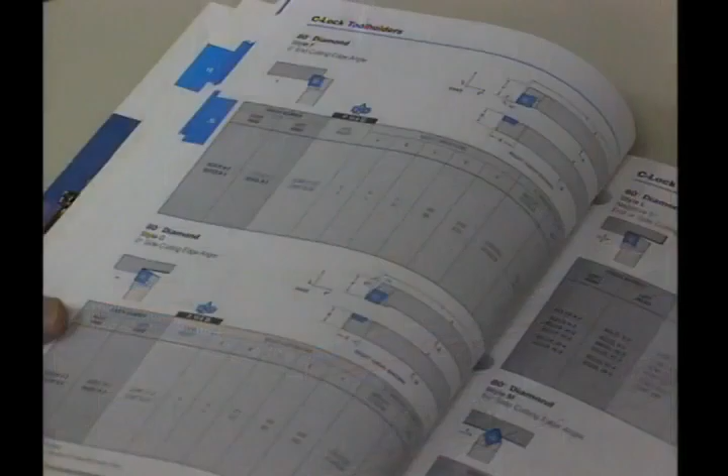Tooling incorporates thousands of different cutting tools and tool holders for discrete parts manufacturing. Principal categories within cutting tools include single-point cutting tools, such as lathe tools, multi-point cutting tools, such as milling cutters, drills, reamers, and taps. Cutting tools are either standard tools, which are purchased as catalog items, or special tools, which are designed and built for a special machining job, often to suit a particular workpiece.

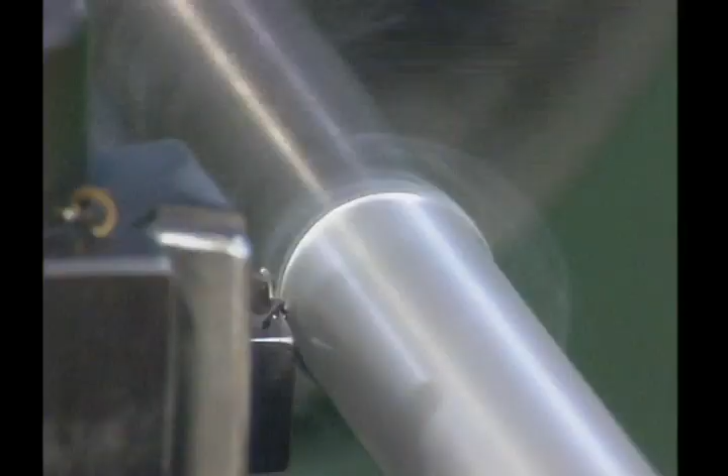The main objective in the selection and application of cutting tools is to safely machine a workpiece in the shortest possible time while meeting the part's quality requirements. Furthermore, the specified tooling should be the least costly and least complex tooling available to satisfactorily fulfill the qualitative and quantitative workpiece demands. It is estimated that nearly 50% of all cutting tools are used incorrectly.

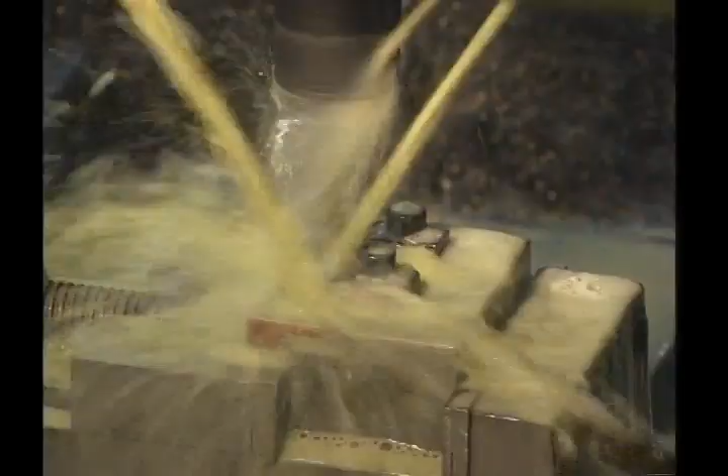Additionally, the number one error when formulating tooling selections is calculating monetary savings based on lowest cost per tool rather than on maximized productivity and extended tool life.

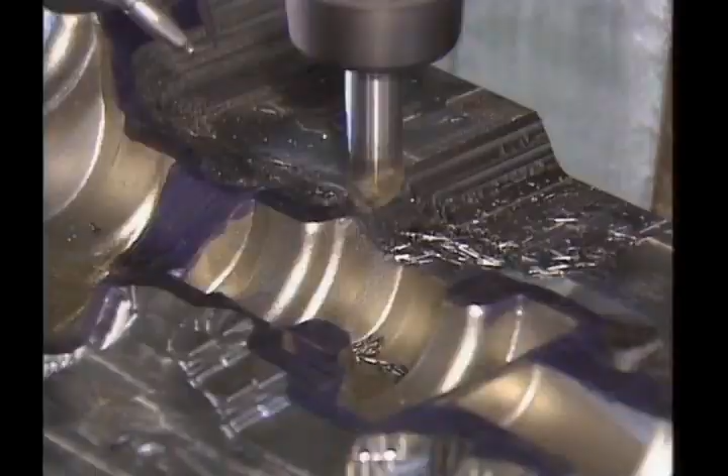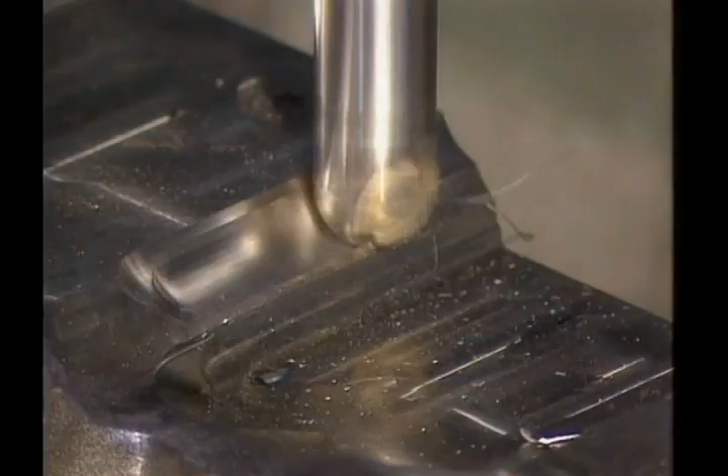To effectively select tools for machining a part, a machinist must have specific information about the workpiece, such as the starting and finished shape, the hardness, the tensile strength, and abrasiveness of the material. These factors all influence the interaction between the tool and the work. The machinist also needs to know whether the workpiece material breaks into short chips easily or whether it tends to flow into long, hard-to-break stringy chips.

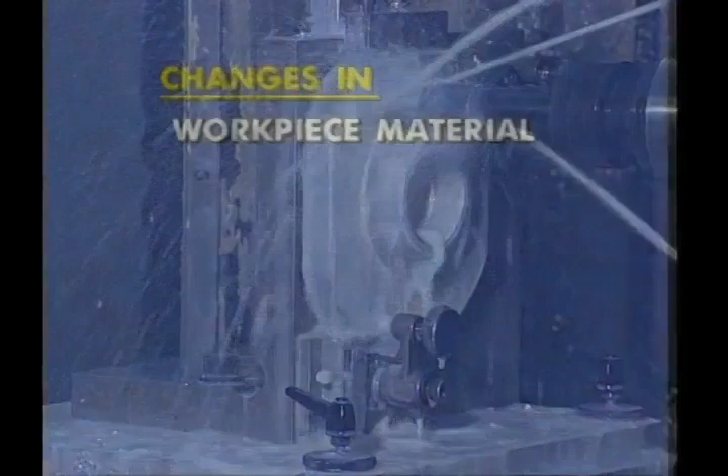Also important is the part's work-holding setup, which properly orientates and holds the workpiece, and the power and speed capacity of the machine tool. Changes in the workpiece material, part tolerances, geometries, and quantities required often demand corresponding changes in the tool materials and/or tool geometries selected.

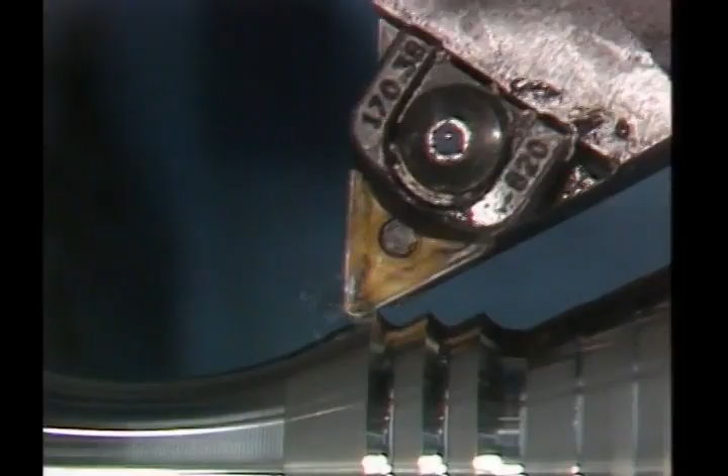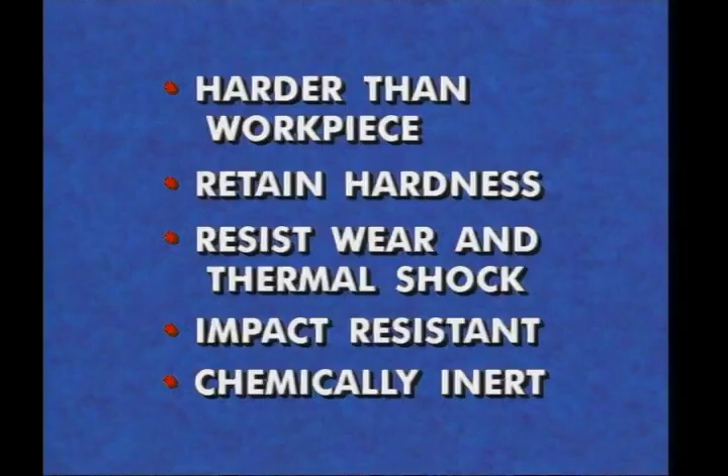For the wide variety of machining applications, there is a corresponding necessity for different cutting tool materials. The ideal cutting tool material should be harder than the workpiece it is cutting, be able to retain its hardness and stability at high temperatures, resist wear and thermal shock, be impact resistant to withstand the mechanical shocks of milling, and also be chemically inert to the work material and the cutting fluid.

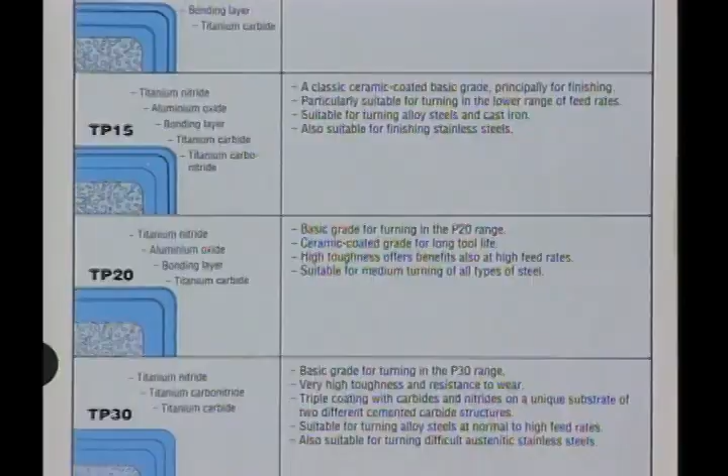No single cutting tool material incorporates all these qualities. Instead, trade-offs occur among the various tool materials. For example, materials with excellent chemical and thermal stability, such as ceramics, tend to be brittle, with limited resistance to mechanical and thermal shock. These variable properties take place both within a material class, such as different grades of carbide, as well as when comparing different classes of tool materials, such as high-speed steel and carbide, or carbide and ceramics.

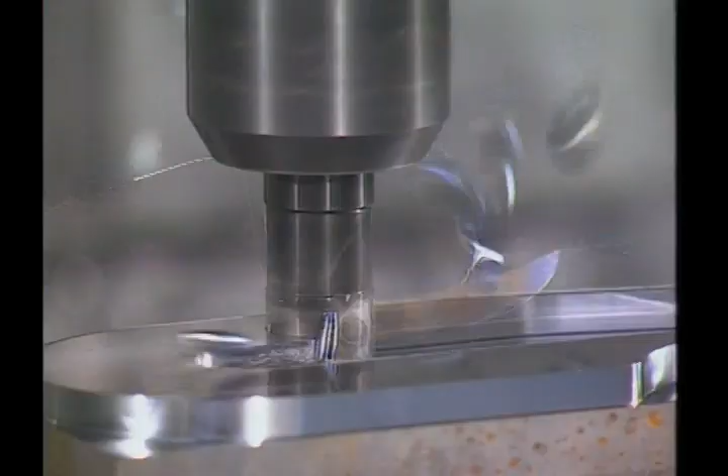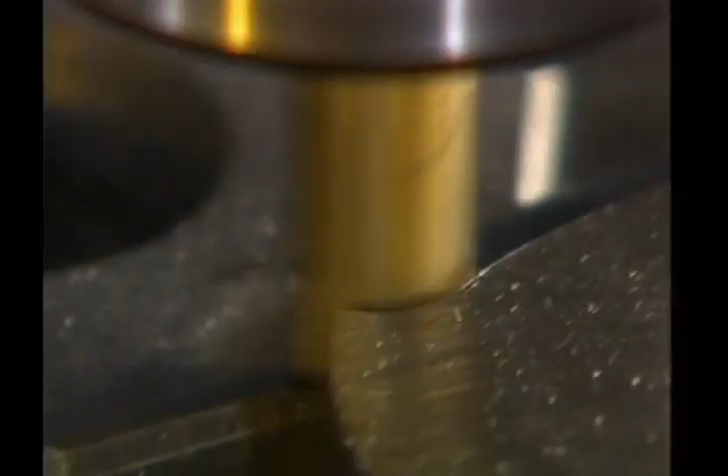Every new and established tool material has an application area in which it outperforms the other cutting tool materials. Newer materials tend to minimize but not eliminate the application of older materials, such as high-speed steel. The development of cutting tool materials has offered steady advancement in the rate of metal removal and, consequently, in the need for more heat-resistant materials. So there has been a progression from high-speed steel to carbide to ceramics and onto other super-hard cutting tool materials.

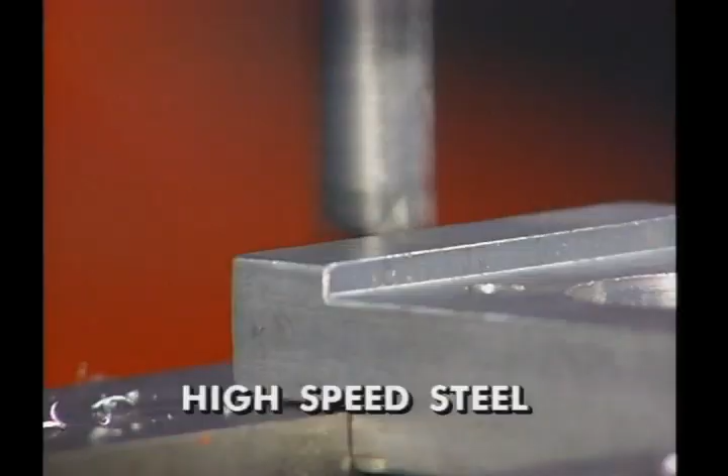High-speed steel tools were introduced around 1900 and gradually replaced the carbon steel tools of the 19th century. High-speed steel cuts about 4 times faster than the carbon steel tools they replaced, hence the name high-speed steel. It operates at temperatures up to 600 degrees centigrade. There are over 30 grades of high-speed steel in 3 main categories: tungsten-based, molybdenum-based, and molybdenum cobalt-based.

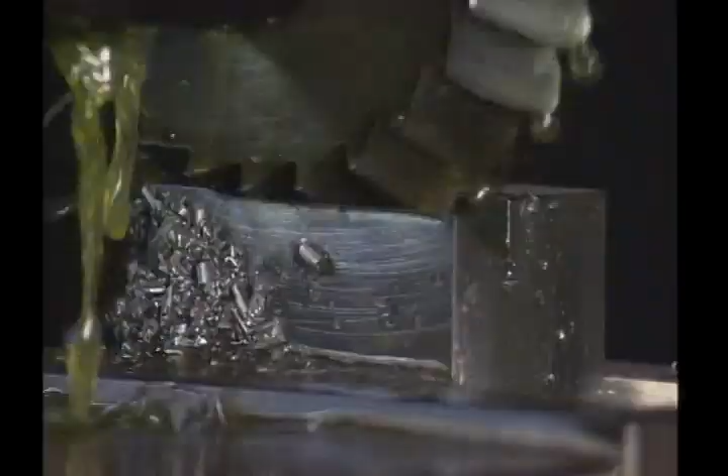Since the 1960s, a form of high-speed steel called powder metallurgy high-speed steel has allowed tools such as drills, milling cutters, and form tools to be made to near-net shapes that offer superior grindability. The use of coatings, particularly titanium nitride, allows high-speed steel tools to cut faster and last longer. Titanium nitride provides a high surface hardness, is resistant to corrosion, and minimizes friction.

In industry today, high-speed steel tools have been replaced by carbide tooling in many areas, but high-speed steel tools are still preferred for some tool room and low cutting speed operations, and for certain tool types such as small diameter drills, taps, and end mills.

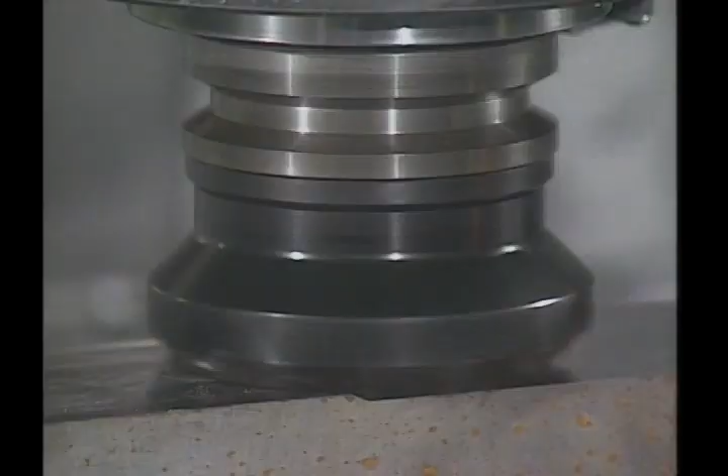Carbide tools were introduced from Germany in the 1930s and today are the most widely used cutting tool materials. Carbide and coated carbide tools in general cut about 3 to 5 times faster than high-speed steel and operate at temperatures up to about 1200 degrees centigrade.

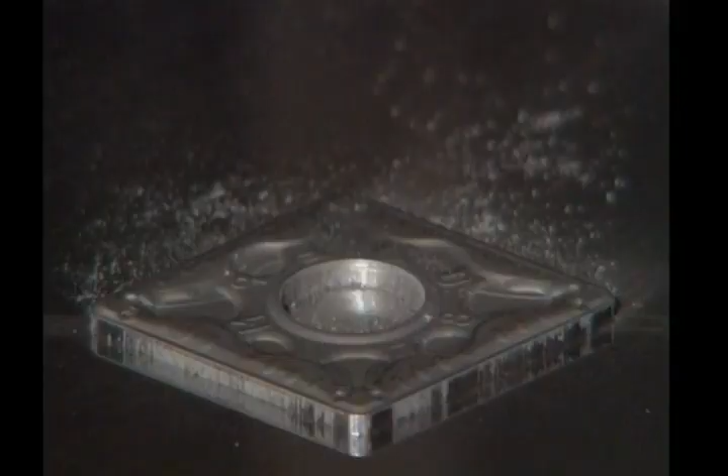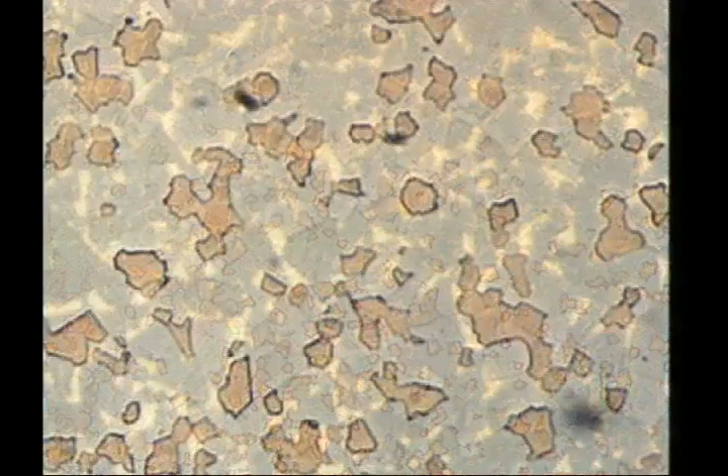Cemented carbide is a powder metal product made up of finely ground hard carbide particles cemented together by a binder. The major categories of hard carbides are tungsten carbide, titanium carbide, tantalum carbide, and niobium carbide. The hard carbide particles are from 1 to 10 microns in size and make up from 60 to 95% of the material. The binder is mostly cobalt.

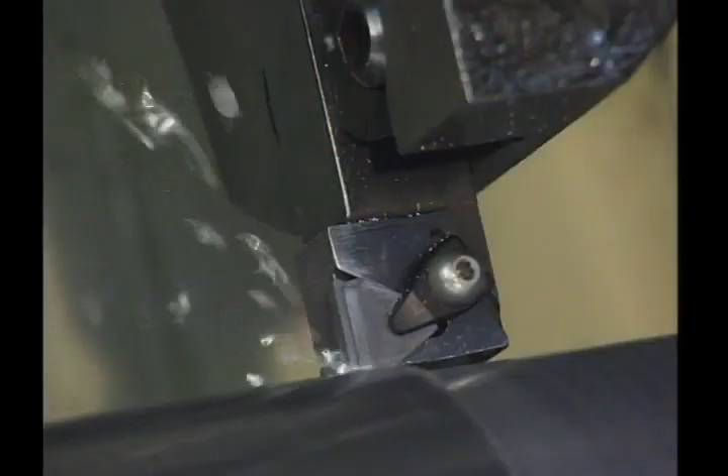Variations in particle size, binder, metallurgy, and manufacturing techniques cause the properties of carbide tools to vary widely, particularly in the balance of hardness and toughness. For example, a higher tungsten content increases the wear resistance of a carbide insert but reduces strength. A higher percentage of cobalt binder increases strength but lowers wear resistance. Additions of an alloying agent, such as tantalum, can increase a carbide grade's resistance to heat but reduce its strength.

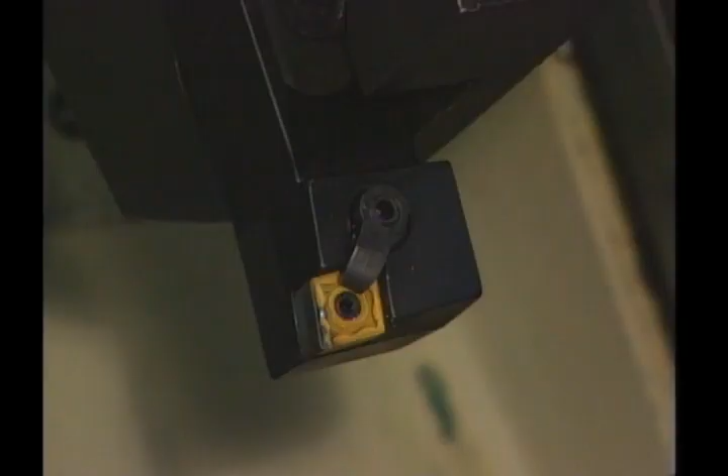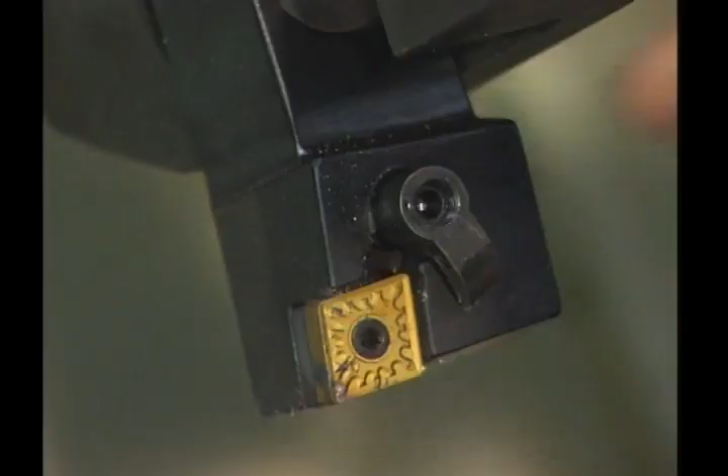Carbide is utilized for solid round tools, such as end mills and drills, or in the form of inserts clamped to a shank or holder. Inserts may be indexed to another position when an edge has worn. When all the tool edges on an insert are dull, the insert is generally thrown away or recycled. Some inserts are single-sided, others double-sided.

Every manufacturer of carbide tools has a variety of carbide grades for specific work materials and types of machining applications. Choosing the correct grade of carbide can double tool life or double the cutting speed for the same tool life. Tough, shock-resistant grades are needed for interrupted cutting. Harder and chemically stable grades are needed for finishing steel at high speed. Heat-resisting grades are needed for machining superalloys, such as Inconel and Hastelloy.

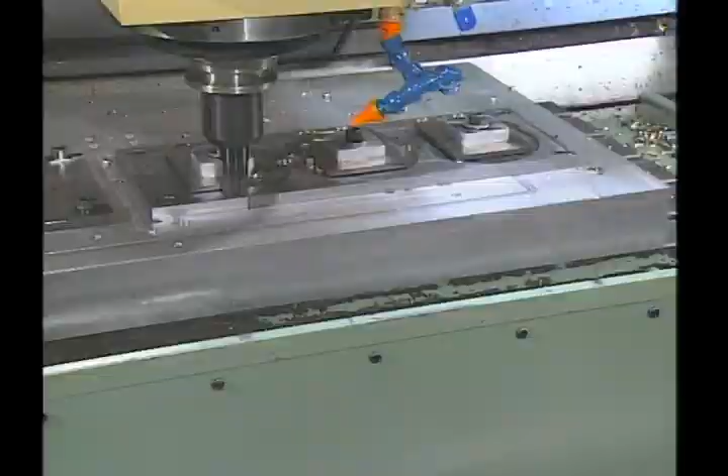There are many considerations when selecting a carbide grade for metal cutting, such as the type of workpiece material, especially its hardness, and the condition of the workpiece's outer skin. If it is a forged or cast workpiece, a tougher insert should be selected. Is the cut heavy or light? Is the machine tool and work holding setup rigid or loose? If loose, then a stronger, more durable carbide grade should be selected.

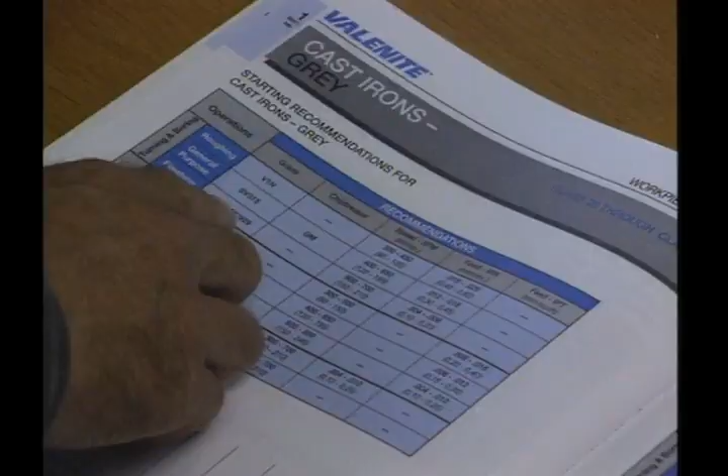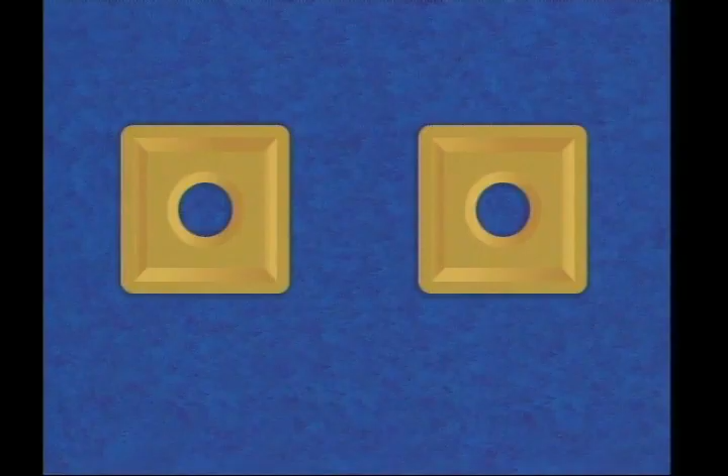Because there are no effective U.S. or international standards for carbide grade specifications, it is the carbide suppliers who recommend which grades they believe are suitable for given applications. Two carbide grades from different suppliers with identical coding in the International ISO 513-1991 standard will likely have different compositions, microstructures, coatings, properties, and, most importantly, performance.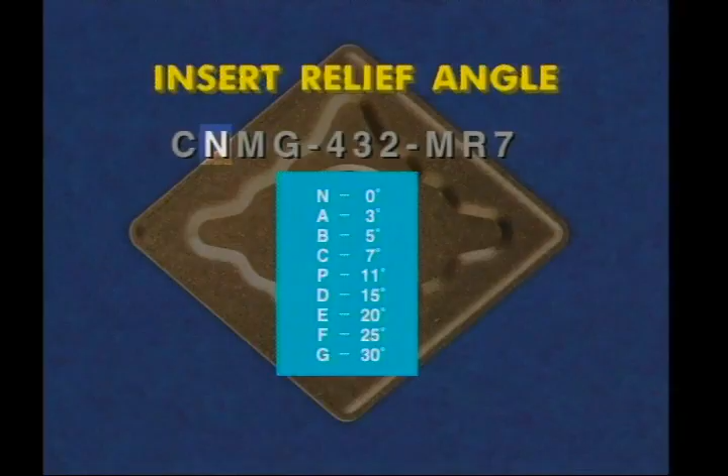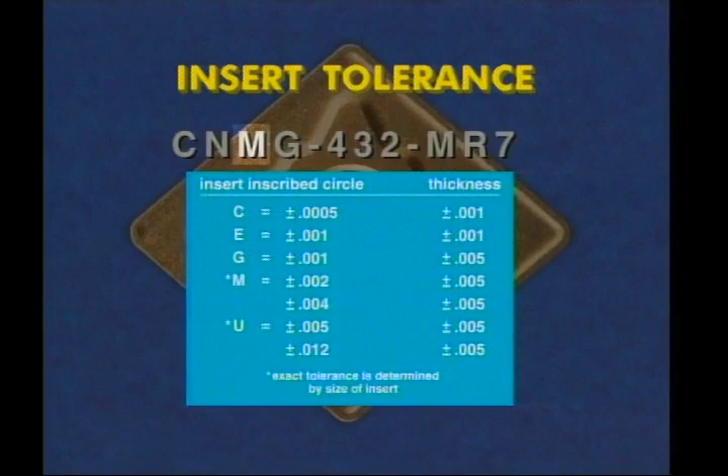Although carbide inserts are not standardized by application, they do carry their own 7-character ANSI code, which is used for their identification. The first character represents the insert's shape. The second character represents the insert's relief angle, which may be from 0 to 30 degrees. The third character represents the insert's tolerance class. Molded inserts usually have a code M tolerance and are the most common.

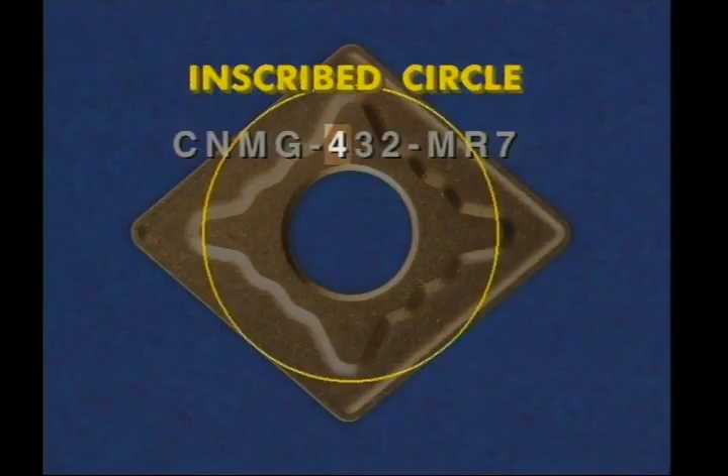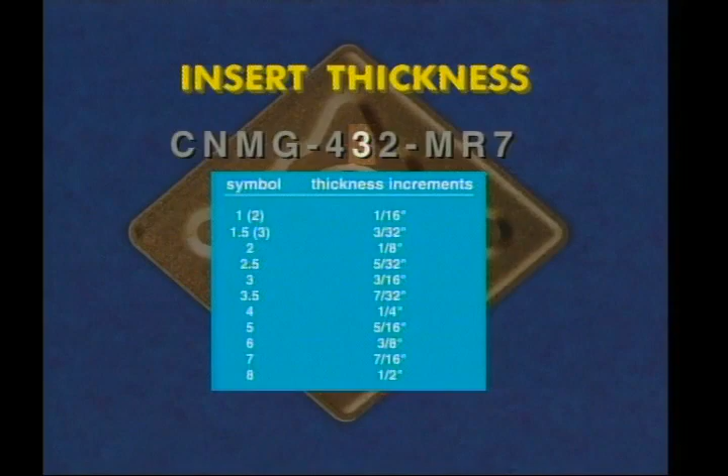The fourth character represents the type of insert with regards to its required clamping system. The fifth character designates insert size by the largest circle which can be inscribed within the perimeter of the insert, known as the inscribed circle or IC size. The sixth character represents the insert thickness. Harder materials and higher feed rates require thicker inserts to withstand the cutting forces. The seventh character represents the corner radius on turning inserts.

On milling inserts, this character represents the wiper edge angle. This ANSI classification system does not categorize everything. For example, the varieties of chip breaker geometries in carbide turning inserts are not required to be covered, but many manufacturers do add a chip breaker code.

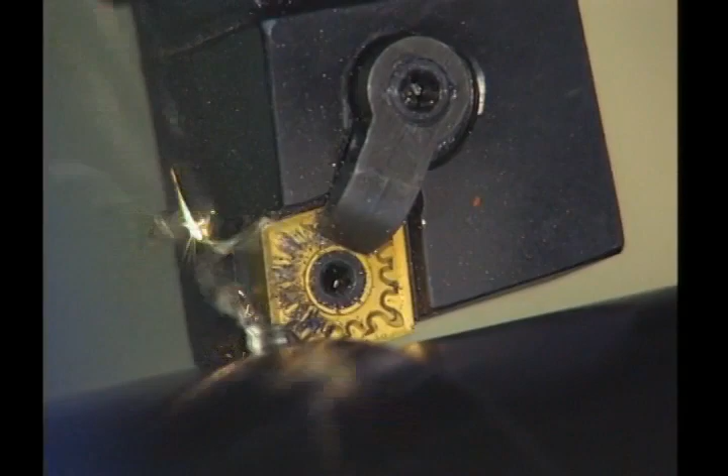Two-thirds of all carbide tools used are coated, and a coated carbide should be the first tool material considered for most operations. In general, a coated carbide tool may have over 3 times the tool life of an uncoated grade, or may operate at cutting speeds 2 to 4 times higher for the same tool life. These coatings help overcome carbide's primary limitation: as fracture resistance or toughness increases, wear resistance or hardness decreases. These wear-resistant coatings provide carbide grades with broad application ranges, offering a combination of characteristics not obtainable with carbide alone.

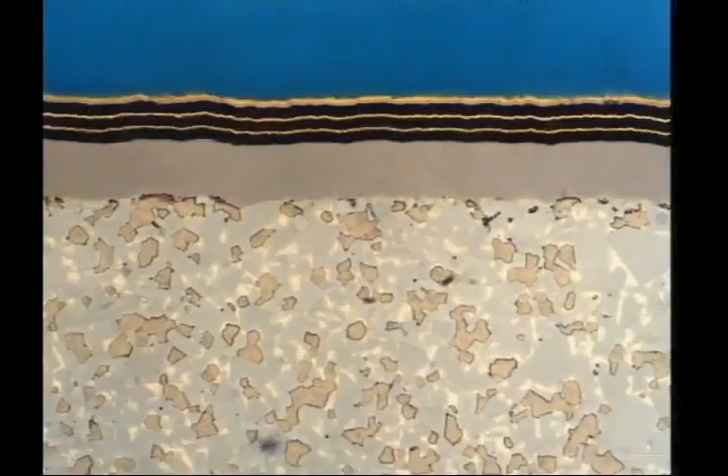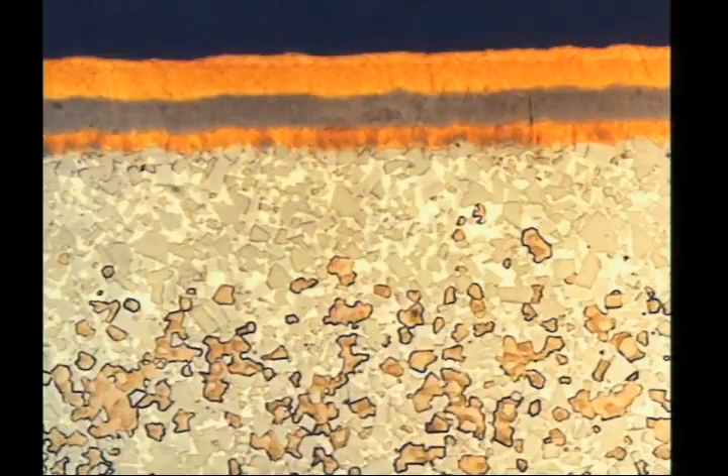Most coatings are under 1/1000th of an inch thick and have several layers. Each layer has a particular benefit, such as resisting heat or decreasing friction. The main insert and cutting tool coating materials are titanium carbide, titanium nitride, aluminum oxide, and titanium carbonitride.

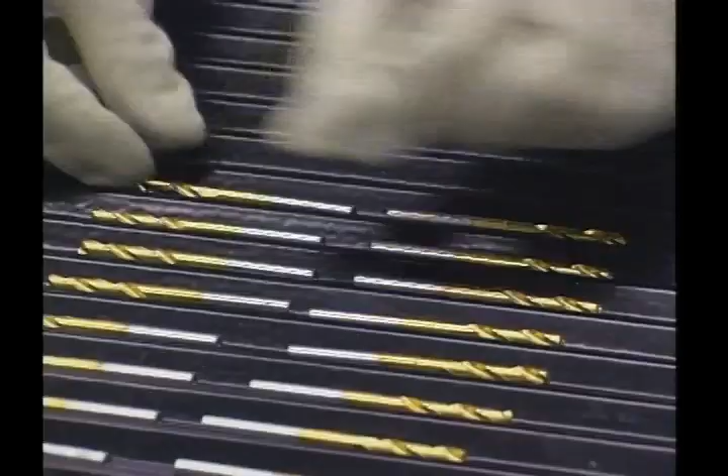Aluminum oxide and titanium carbide are very hard and chemically inert, and titanium nitride minimizes friction. For an appropriate coating, the coating material must adhere or bond strongly to the carbide tool surface. The two major coating methods are chemical vapor deposition and physical vapor deposition.

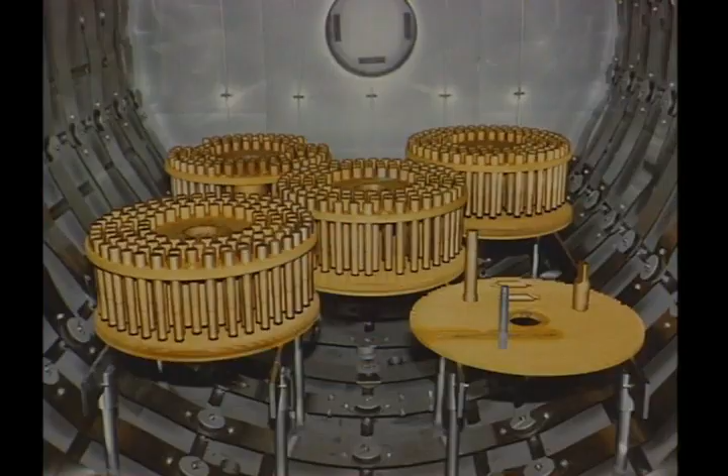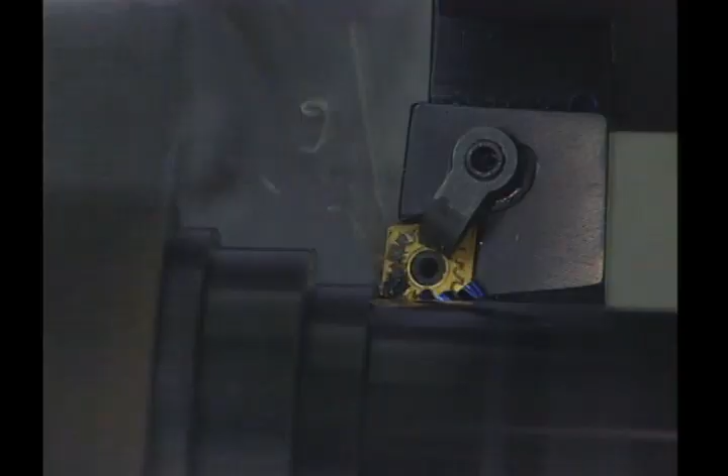The chemical vapor deposition process takes place at about 1,000 degrees centigrade and is typically required for multi-layer coatings. The physical vapor deposition method takes place at temperatures around 500 degrees centigrade and is used for single-layer or dual-layer coatings. Coated carbides are more costly on a per-insert basis than uncoated inserts, but they achieve greater productivity. In terms of parts per edge, the coated carbides have the advantage.

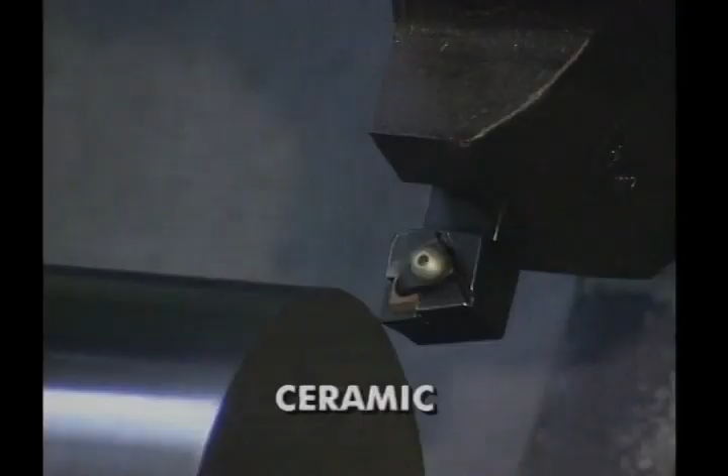Ceramic tools are harder and more heat-resistant than carbide tools, but also more brittle. They have been successful in machining cast iron, hard materials, and superalloys. Best results are at high speeds, which mean high cutting temperatures.

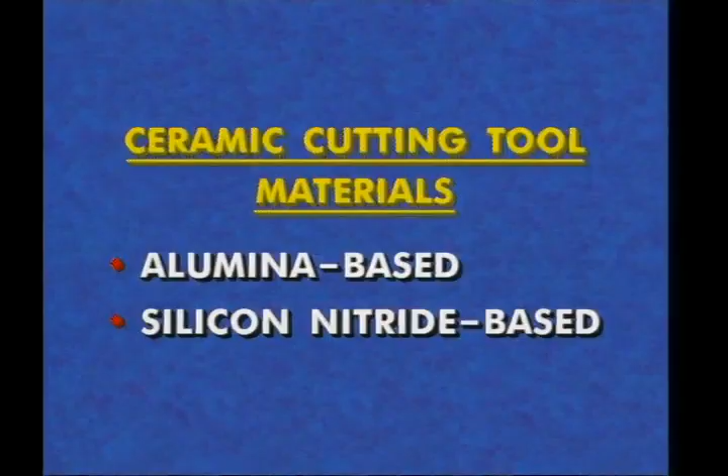Ceramic cutting tools can be divided into alumina-based ceramics and silicon nitride-based ceramics. Alumina-based ceramics are used for high-speed semi-finishing and finishing of ferrous and some non-ferrous materials. These tools are not good with aluminum because of an affinity between the materials. Alumina-based ceramics offer mechanical and chemical wear resistance, but lack toughness and thermal shock resistance. Thus, they are generally not used for milling, rough turning, or for interrupted cuts.

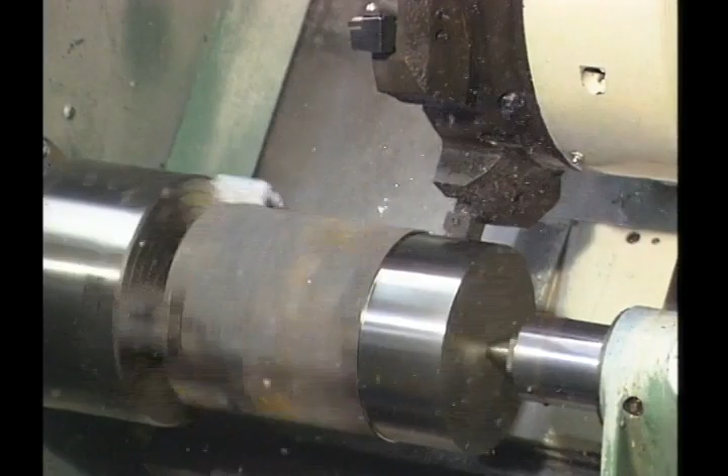Silicon nitride-based ceramics, also called Sialons, offer greater toughness and thermal shock resistance than alumina-based ceramics. They are used in high-speed roughing applications and have excellent abrasion resistance. Silicon nitride-based ceramics are used for high-speed machining of gray cast iron, as well as on superalloys such as nickel and cobalt-based work materials.

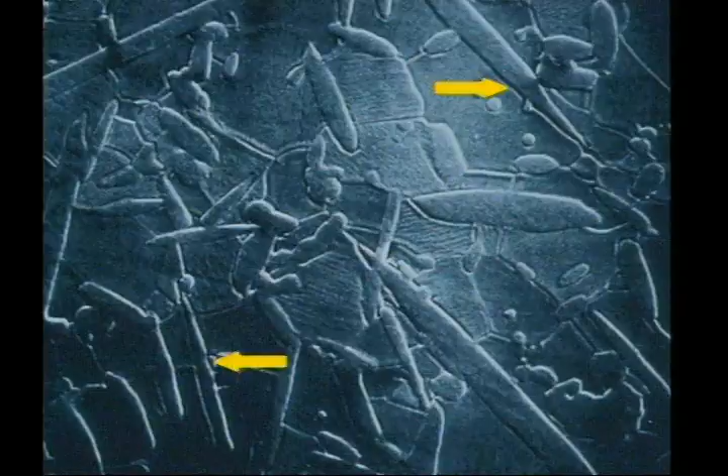Whisker-reinforced ceramics, with silicon carbide reinforcing whiskers in an aluminum oxide matrix, are stronger than the brittle ceramic matrix alone. The whiskers act like rebar in concrete, adding mechanical strength and thermal conductivity.

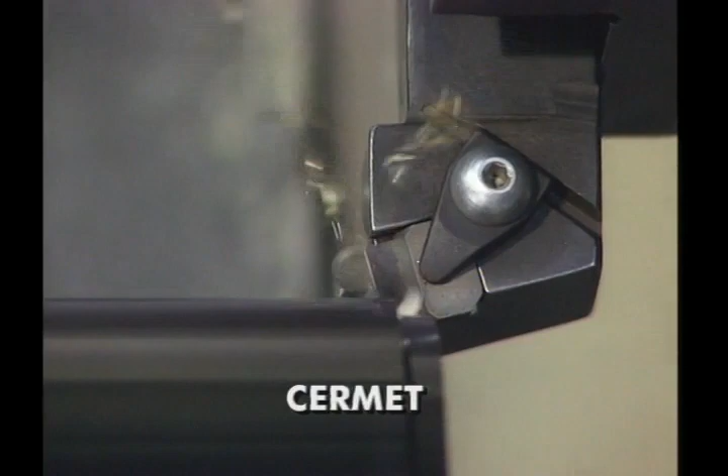Cermet tools are composed of materials commonly applied as coatings to carbide tools, titanium carbide and titanium nitride. The solid Cermet insert offers excellent resistance to various causes of wear in machining, especially chemical resistance. Initially used only for semi-finish and finish turning and boring, some Cermet grades are now tough enough to handle rough turning as well as milling applications on carbon steels, stainless steels, and some ductile irons.

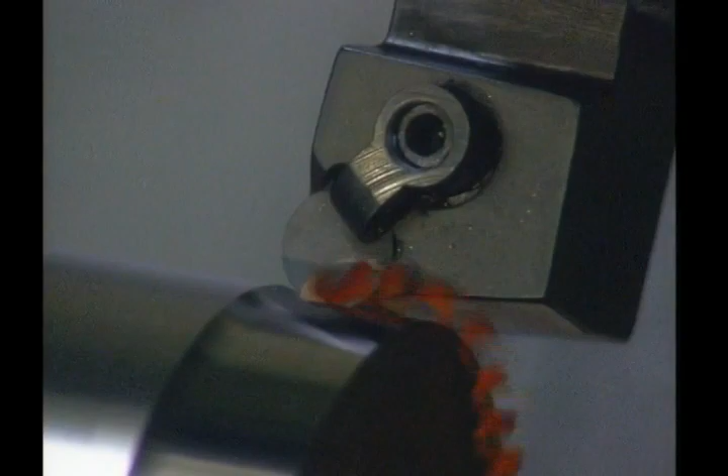Super hard tool materials are divided into two categories: cubic boron nitride and polycrystalline diamond. Typically, a small tip of one of these super hard materials is bonded to a carbide insert base. Super hard inserts may cost 30 times more than a carbide insert, so their use is limited to well-chosen, cost-effective applications.

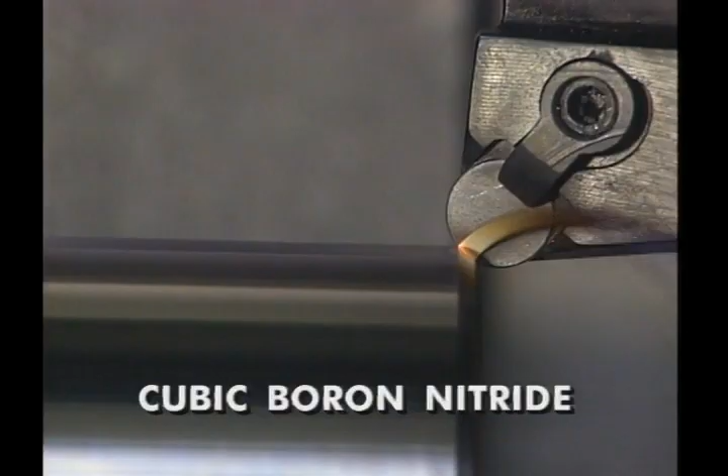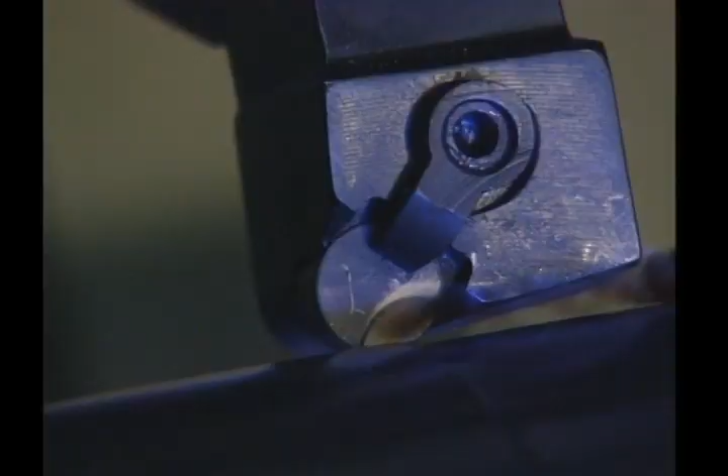Cubic boron nitride, or CBN, the second hardest material after diamond, is used to provide long tool life in machining very hard, tough ferrous materials, hardened die steels, alloy steels, and hard-facing materials. CBN is a hard, brittle material requiring cutting-edge preparations to suit application needs. Other techniques are utilized to protect the cutting edge, such as the use of a lead angle where possible, and a strong shape, such as round or square, is recommended.

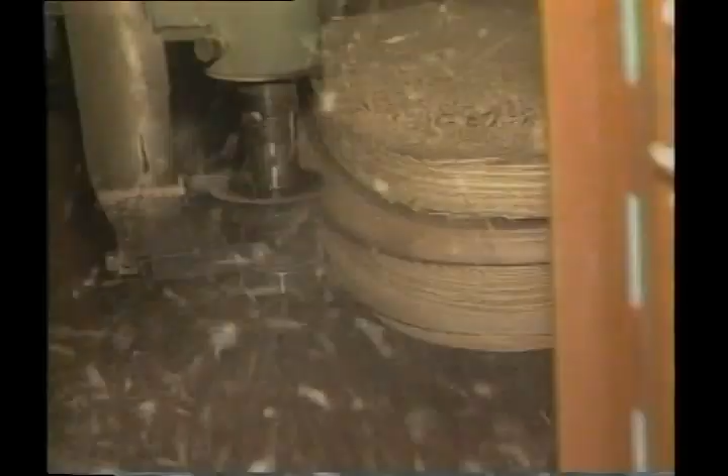Polycrystalline diamond, or PCD, is composed of micro-sized diamond particles in a metallic binder and is over 50 times harder than common carbide. PCD is used for non-ferrous applications and also cuts abrasive materials such as glass, reinforced plastics, and hardwoods for furniture manufacturing. In some high-volume applications, PCD inserts have machined parts for 6 months before having to be replaced, outlasting carbide by up to 100 times.

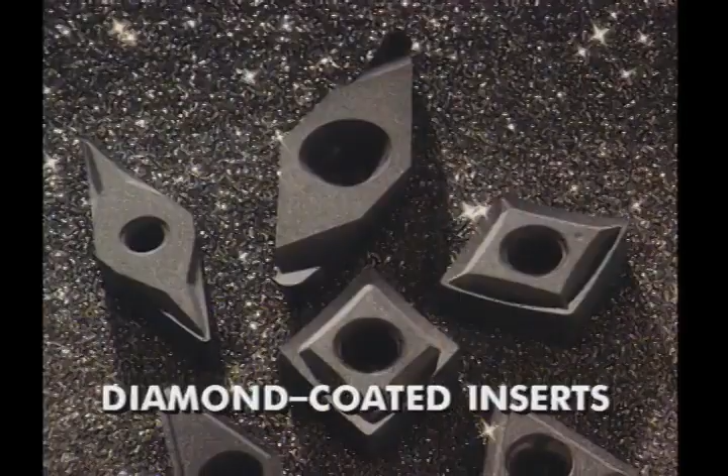Diamond-coated carbide and ceramic inserts are a recent addition to cutting tool materials. They offer a greater variation in geometries than do PCD inserts, but like PCD, can only be used for machining non-ferrous materials.

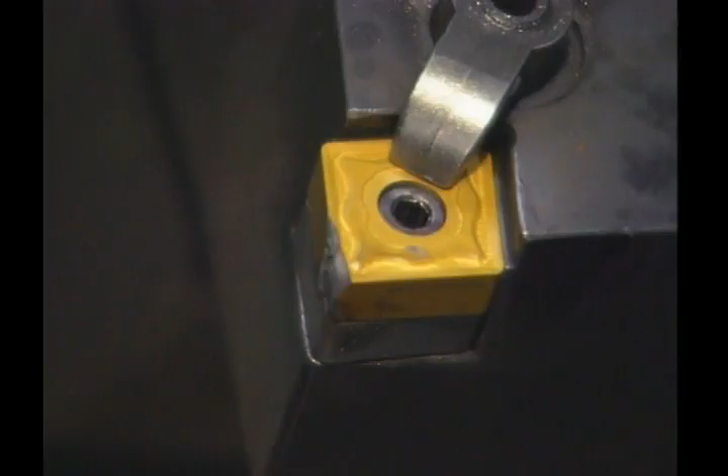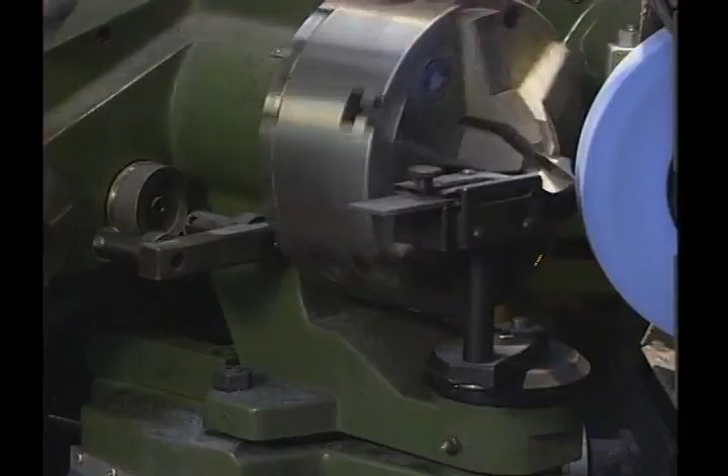All cutting tools have a working life, and then they dull, fail, or fracture. For this reason, they are called perishable tools. The cutting tool life cycle may be a single use, or involve indexing to multiple edges, as with an insert, or multiple resharpening, such as with drills, end mills, and taps.

It is a safety hazard to run any cutting tool until it breaks. This creates scrap, impacts tool and part costs, and reduces productivity. Aside from breakage, cutting tools wear in many different ways. Edge wear and flank wear are both a normal and slow type of tool wear. In carbide turning of steel, it often occurs after 15 to 30 minutes of cutting.

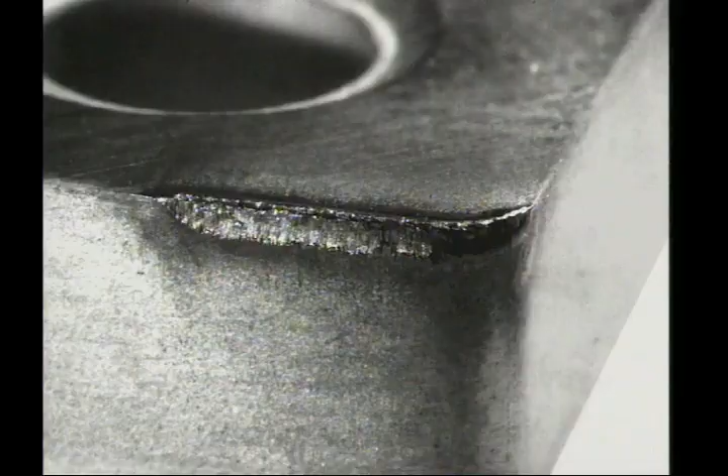If the work material is highly abrasive, such as with certain cast irons, this type of wear will accelerate. To correct this problem, select another more abrasion-resistant tool grade.

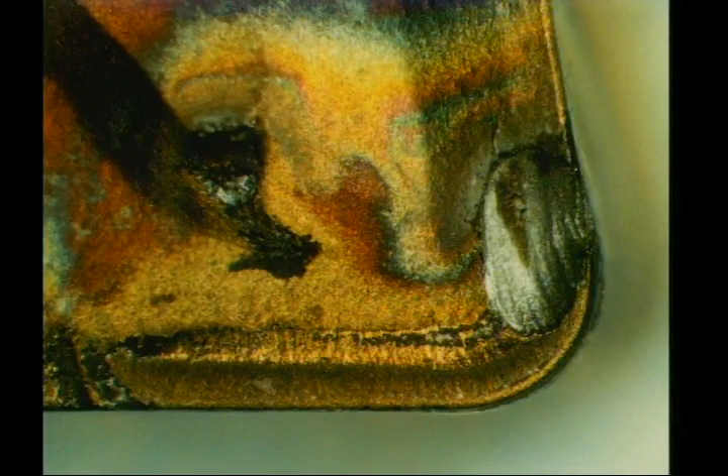Cratering, or top wear, behind the cutting edge occurs commonly in machining long chipping steels, from abrasion and diffusion wear. If the crater grows large enough and contacts the cutting edge, the tool fails immediately. To combat cratering, use hard grades of carbide with tantalum carbide or titanium carbide and hard coatings such as aluminum oxide or other materials such as cermets or ceramics.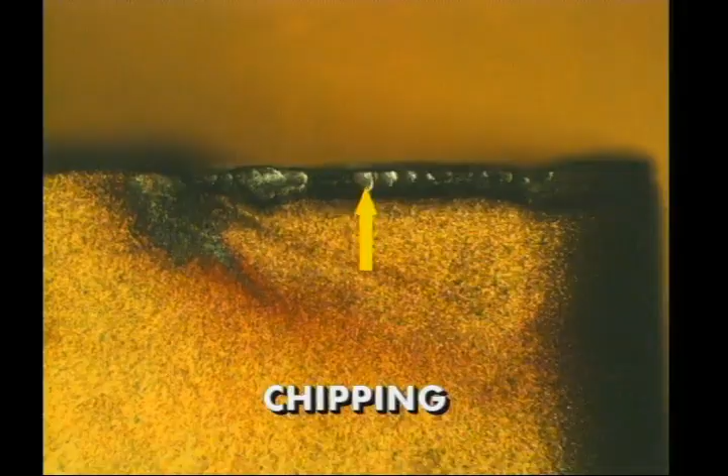Chipping on a tool edge is an unpredictable form of tool failure. It is sometimes started when a high point on an edge breaks away. A stronger carbide grade, different edge preparation, or lead angle change may eliminate chipping.

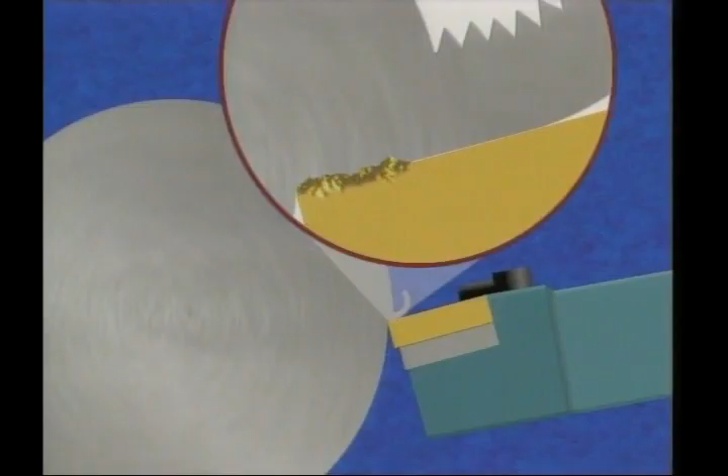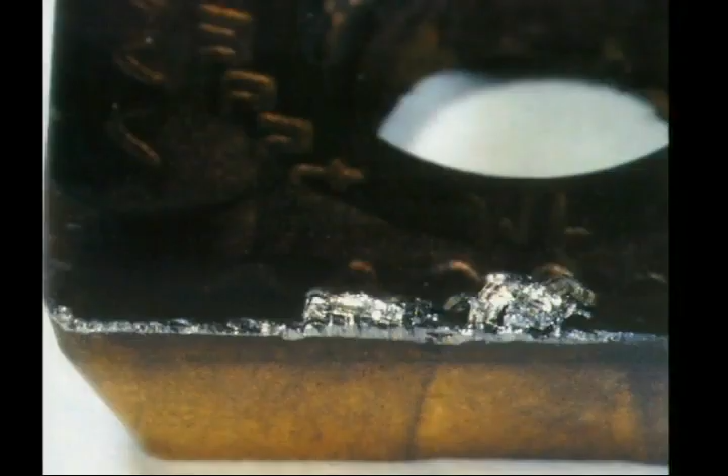A built-up edge is a deposit of workpiece material adhering to the rake face of the insert. Chips weld themselves to a cutting edge. Sometime later, the deposit breaks off and pulls small pieces of carbide out of the edge. This occurs at or just behind the edge. Ductile materials such as low-carbon steel, soft aluminum, and copper cause this damage. Higher rake angles, faster cutting speed, and higher pressure cutting fluid all help eliminate built-up edge.

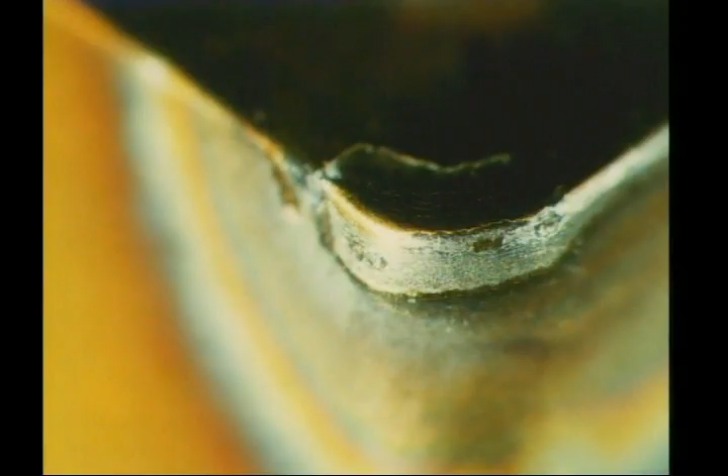Deformation takes place at very high temperatures, 1800 to 2000 degrees Fahrenheit. These temperatures cause the insert binder material to soften, depressing the top surface and mushrooming the sides out into the clearance angle, where it is abraded away. Deformation is difficult to detect without the use of a microscope. A deformation-resistant grade, and/or high hot hardness coating is required, or else reduce the operation speed to reduce the heat.

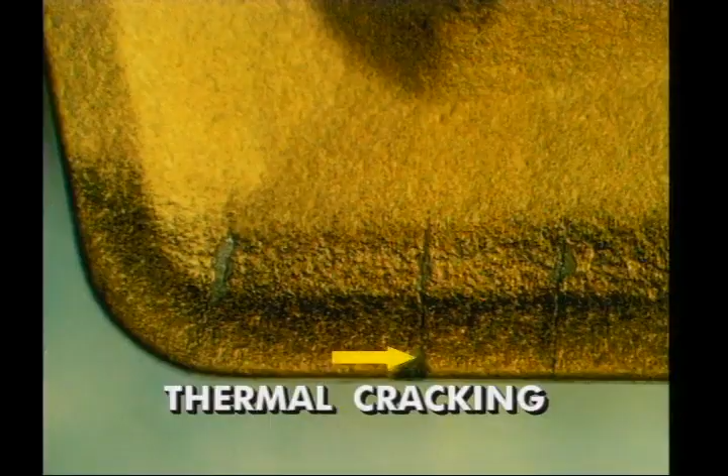Thermal cracking occurs when inserts go through a rapid heat-cool cycle, such as in either interrupted cutting or when the coolant is improperly applied, suddenly cooling a hot insert.

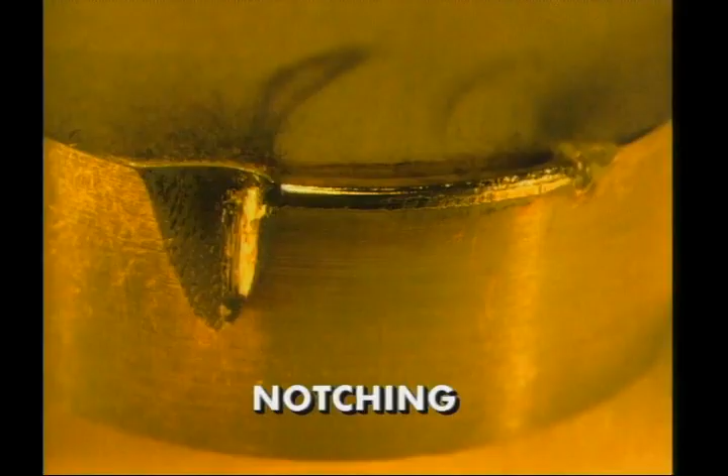A notch at the depth of cut line may occur in machining high-temperature alloys or with any very hard outer layer, such as in a casting or forging. This is caused by the pullout of small particles of tool material at the flank, face, and cutting edge by the pressure welding of work material to the tool material. An edge preparation on the insert and an increased lead angle may decrease notching.

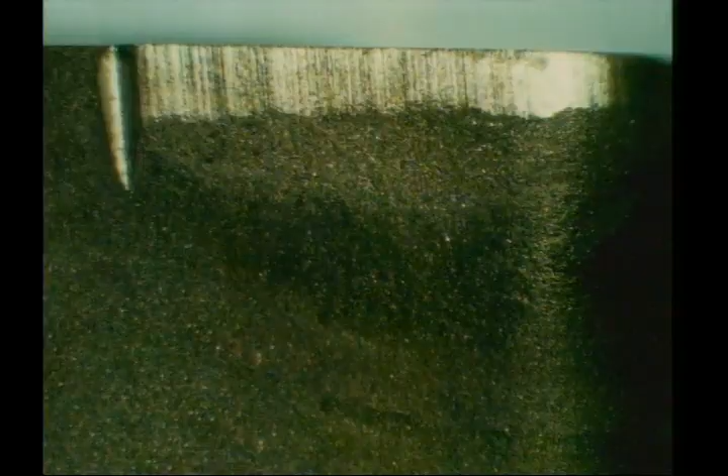These are only some of the natural causes of tool wear. Maximum tool life can be achieved through selecting the proper insert or tool material or altering the cutting conditions.

Let's re-examine the material contained in this videotape. The main objective in the selection and application of cutting tools is to safely machine a workpiece in the shortest possible time while meeting the part's quality requirements.

There is no ideal cutting tool material, but the rapid evolution of tool materials has given us a wide choice to meet any need. High-speed steel tools are commonly used in tool rooms and in low-speed operations. Round tools such as drills, taps, and end mills are commonly made of high-speed steel. Coatings have extended the applications and cutting life of high-speed steel tools.

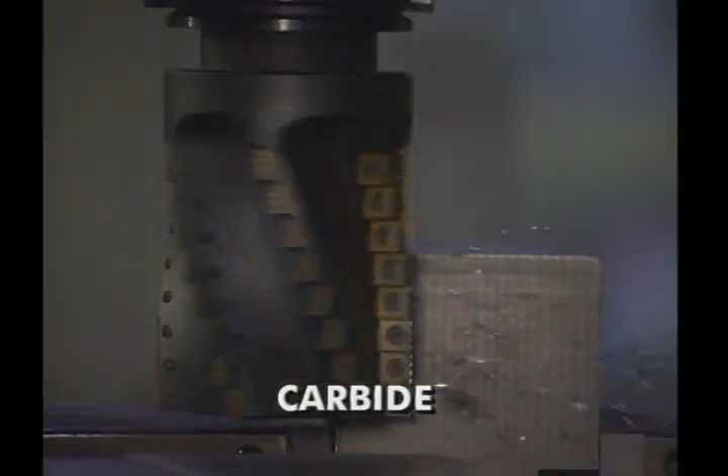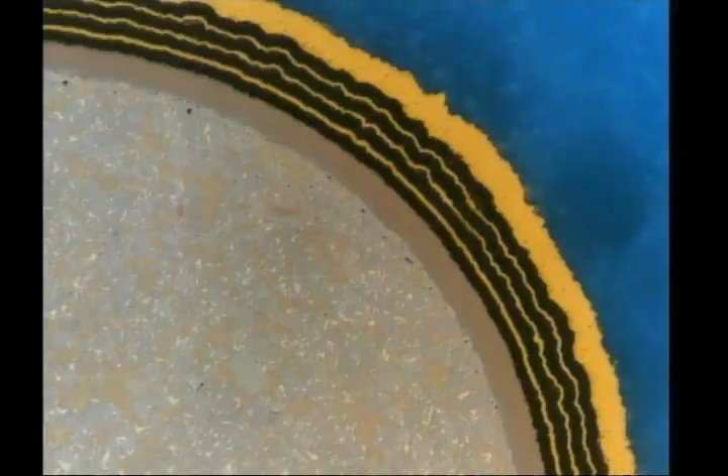Carbide tools, particularly coated carbides, are today's most common cutting tool material. There are a great variety of carbide compositions and coating types. Carbide tools may be indexable inserts or solid round tools such as small diameter end mills or drills. Coated carbide inserts are the first tool material to consider for most production operations. Most insert coatings have multiple layers to protect the tool against abrasion and chemical wear.

Ceramic inserts may be alumina-based or silicon nitride-based. They withstand higher heat than carbide, have good resistance to abrasion, and they cut very fast. But ceramic inserts are less shock resistant than carbide tools, so their applications are limited.

Cermets are composed of titanium carbide or titanium nitride with excellent resistance to various forms of wear. But cermets do not withstand high heat well. The super hard materials are cubic boron nitride, CBN, for ferrous applications, and polycrystalline diamond, or PCD, for non-ferrous applications. Both materials are expensive, but can outlast carbides by 10 to 100 times.

All cutting tools have a finite performance life. Then they wear out or fail. Hence, they are called perishable tools.

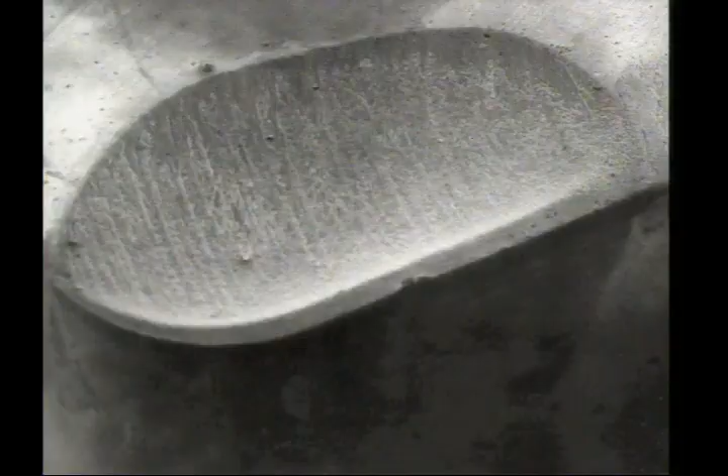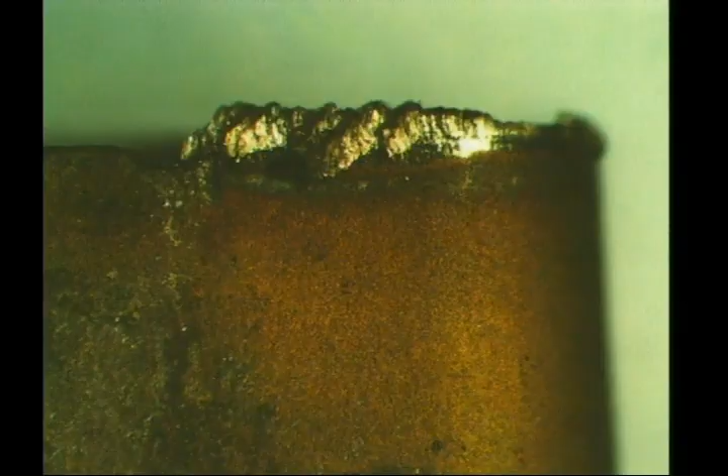The varieties of cutting tool wear include edge wear, flank wear, cratering or top wear, chipping of the tool edge, deformation, and the edge damage caused by the pulling away of material on a built-up edge. Two other types of tool wear are thermal cracking and notching.